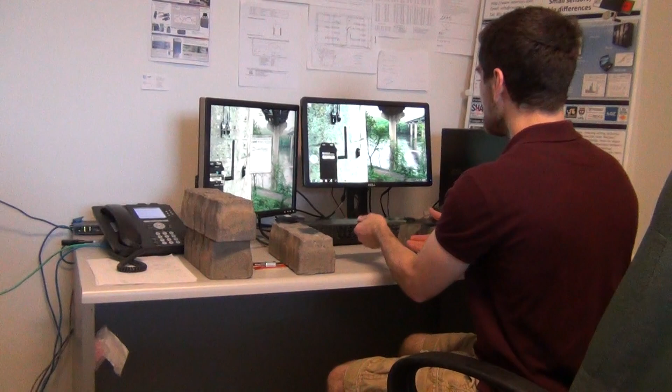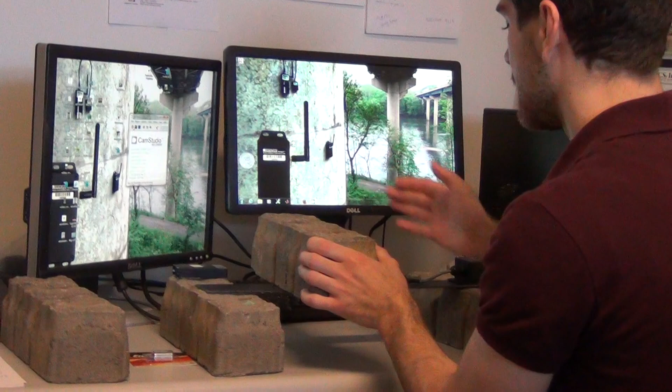So first we have our setup. We have our strain SenSpot attached to a beam, so we're going to be looking at the strain that this beam goes through. So what we have with our setup is we have it resting on two bricks, and then we're just going to take one of these bricks and put it on the beam and see what kind of strain the beam goes through, and then we'll put the other brick on top and see how the data is collected accordingly.

So just materials for the setup is we have the strain SenSpot sensor with the beam, we have the two bricks that it's going to be resting on, we have the other two bricks that we're going to be putting on the beam, and then here we have an Energizer lithium CR2 battery. This is the recommended battery that goes in the SenSpot to get the maximum battery life.

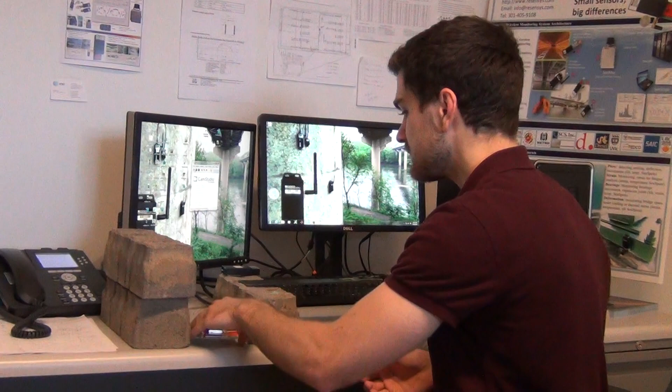And we have an antenna that we're going to attach to the SenSpot. The polarity of the antenna is very important. On the SenSpot we have a male port, so we need a female port on the antenna. Only a male to female connection will work. So once we have the antenna connected, we're just going to flip the antenna up. And now we're ready to open the SenScope software.

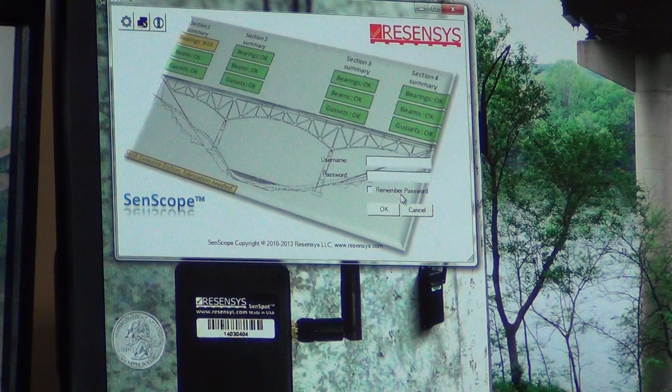Now once you're at the title screen of SenScope, you don't have to worry about this login information at all because we're going to be in live mode. Also, because we're going to be in live mode, you have to make sure that you have the licensing dongle and the USB sync dongle. Both of them must be connected to USB ports on your computer to use live mode.

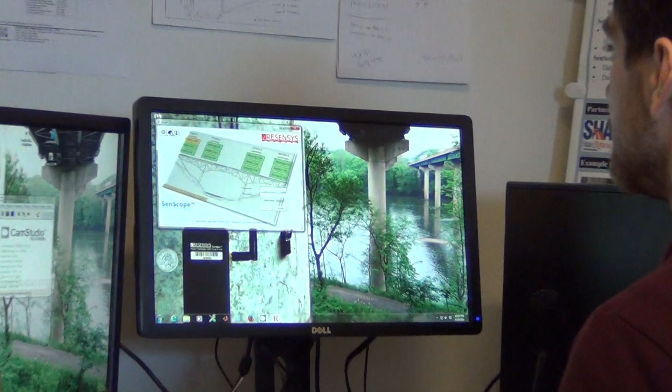Once everything is in order, we go to the second button, which means live mode, and we just click it. Once SenScope opens, under data source, we pick the live radio button. Now, before we open the serial port, we just want to make sure that the COM serial port settings are okay. The COM port is usually selected as a default by the software.

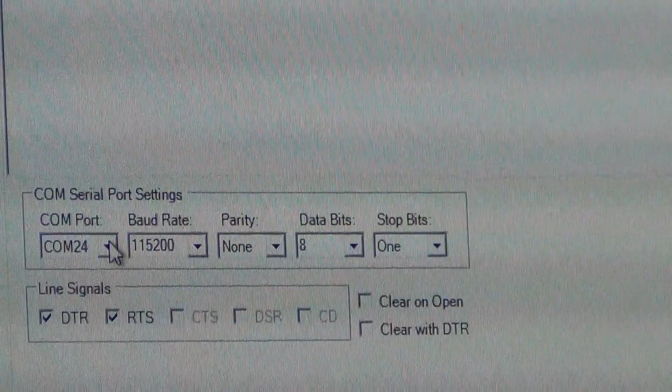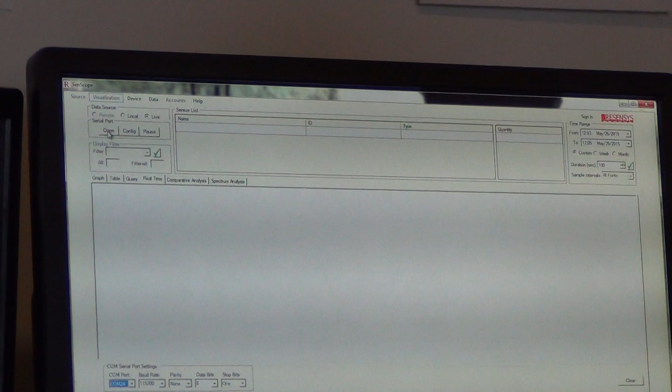More things will show up if you have more devices connected to your computer, but you just have to select the appropriate COM port. The baud rate, parity, data bits, and stop bits should all be at their default values when SenScope is first opened. So now that everything is good, we will open the serial port and start collecting data. So here are some data packets that are being transmitted.

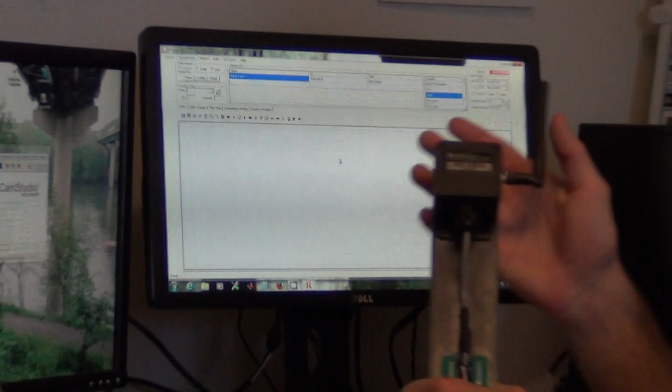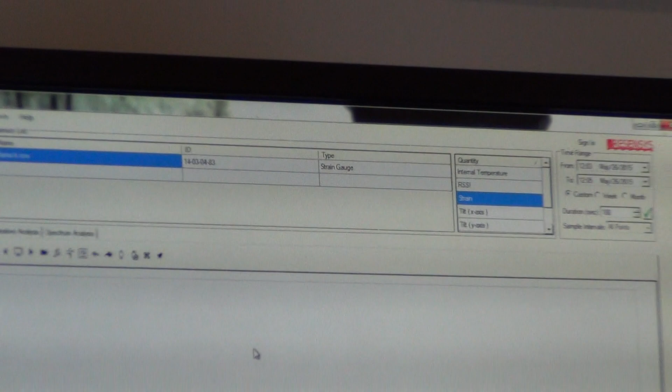I'm just going to go straight to the graphing mode, and we want to look at this strain SenSpot. So I need to identify it on the computer. So usually there's more SenSpots on the computer, but just for demonstration purposes, I have to look at the ID number. Here I can see that the ID number is 14030483.

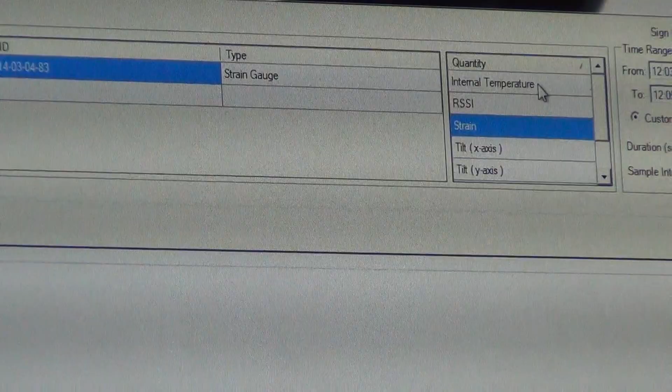So usually there are many more sensors on this sensor list, but I would match up the ID 14030483, and I also know that it's a strain gauge under type, and usually there'll be other types like acceleration and others. Now I can choose which quantity I'd like to graph. I have things like internal temperature, tilt, strain, and now we can see the other SenSpots popping up on our list.

So I'm just going to highlight strain, make sure that I have my appropriate SenSpot by the ID highlighted, and I would just press Add Chart. So here I can see all of the data that this SenSpot has collected in strain. The units are microstrain. This is all the data that we've collected since we have opened the serial port.

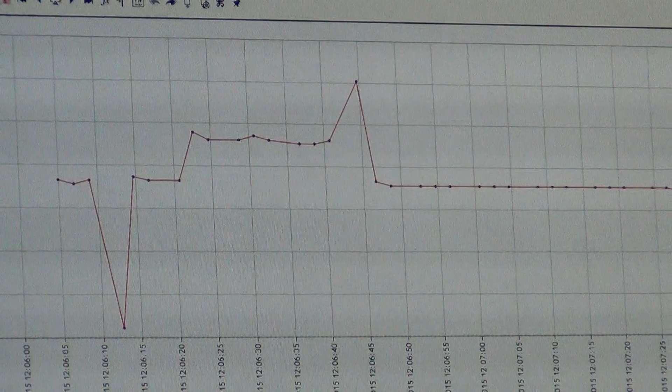So now I'm just going to put the beam under a little bit of stress, administered by the bricks. So I'll take the first brick, and you can see that the data right now is pretty constant, and when I put this brick on, you're going to see a huge change. So I'm putting the brick on right now.

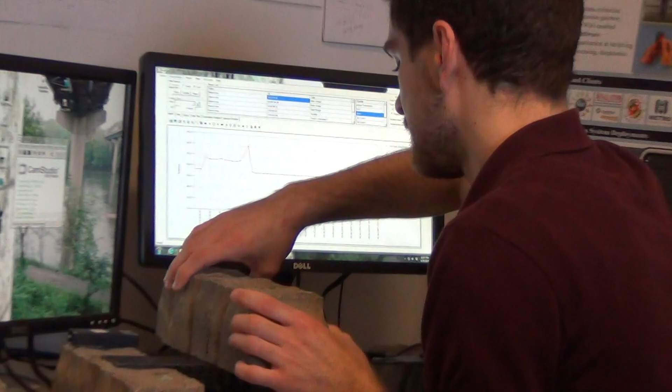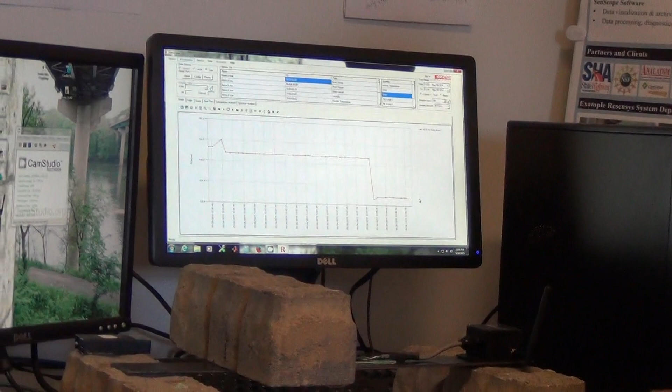So here we have that it's about 147 microstrain, and after the brick was put on, it went down a lot to around 108 microstrain, and we'll just let that transmit one more time before we put the other brick on. And you can see here it's pretty constant.

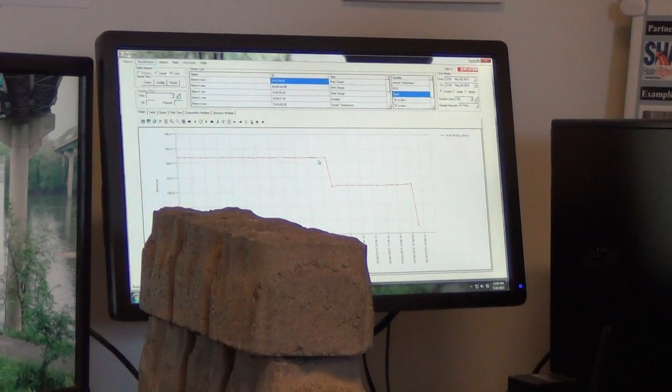Alright, I'm going to put the second brick on, and again you'll see a big jump in the collected data. So I'm just making sure that the brick is stable. Don't want it to fall. And now you can see, this is when no bricks were on it. This was when the one brick was on it.

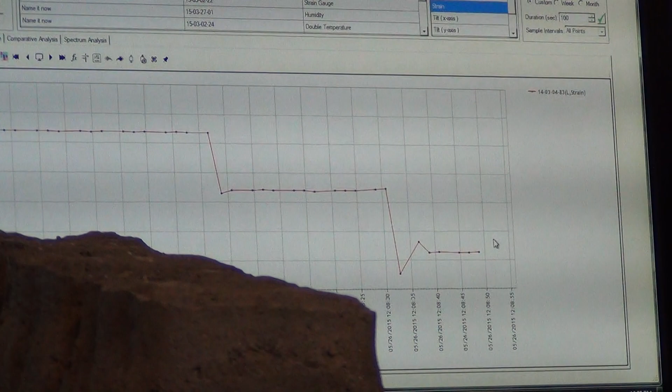And now the strain jumped a little bit because I was moving the bricks around, but it went down again even further from around 108 to around 65. So we'll let that transmit one more time. Alright, now I'm going to take the second brick off, and we'll see the data come back to around the first brick data. So I'm taking the brick off.

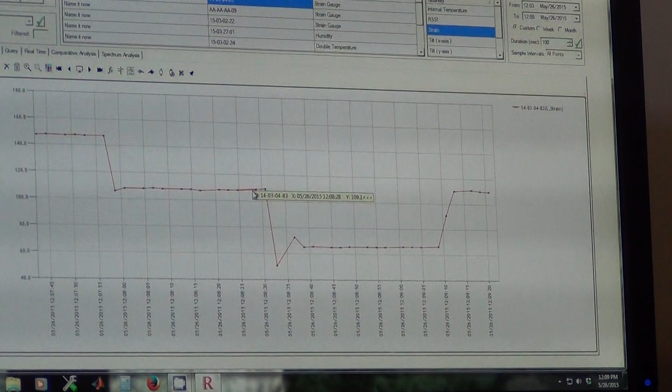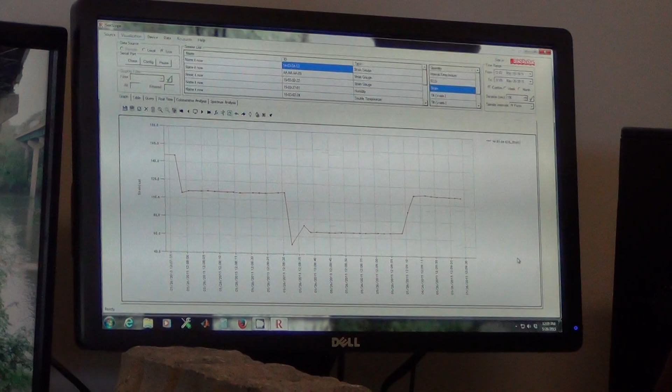Here's our jump that we were looking for. It comes up almost instantaneously. And we're back at around 110, which is very close to where we were before compared to 109 or 108. And now I'll let it transmit one more time. And then I will take off the last brick and put it back to its original state.

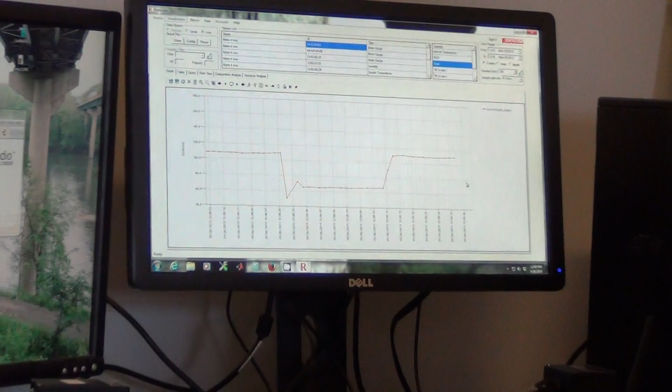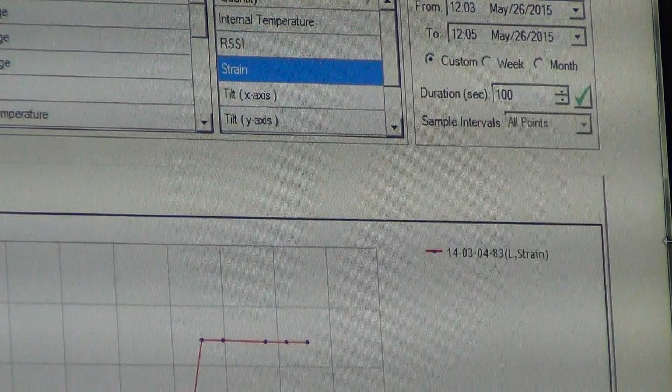So there's the data. I'm going to remove the brick. Good, now it's back to the original state. I'm going to widen up this data just a little bit so that we can see all the data that we've gone through. So with this duration, I'm just going to make it 200 so that we can see more data. And I'm just going to pause the graph also so we can look at it.

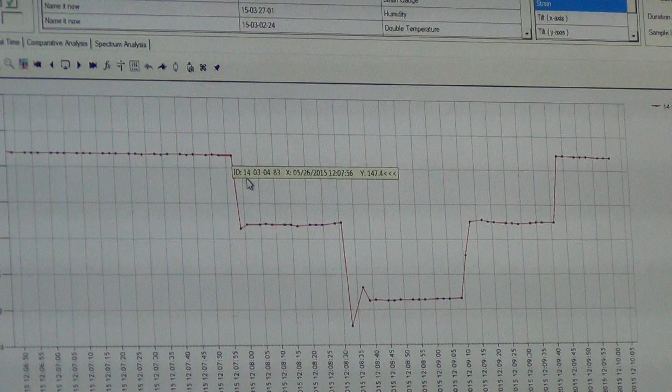This stops not the transmitting, but just stops the graph collecting data for a second while I look at this graph. So here's when we had nothing on the beam, pretty much consistent around 147. Now this is when the first brick was put on, and it jumped down to around 108. And then this was the second brick, and we saw a little bit of variation because I was moving around the brick to stabilize it. We went down to 65, so we went 147, 108, and 65.

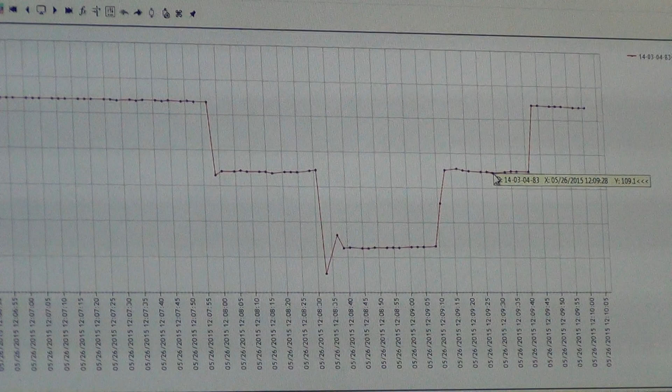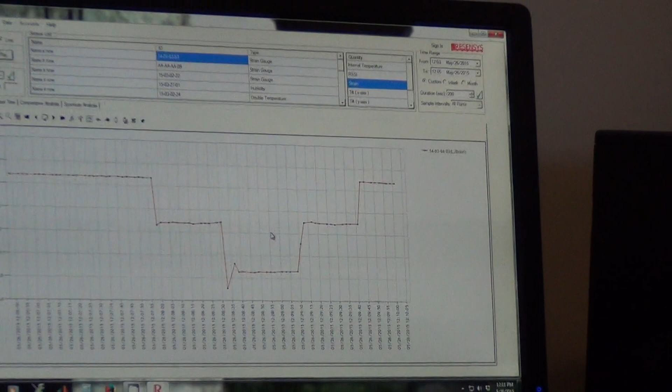Now when we removed the second brick and had only the first brick, we went back to around 110, which is very, very close to what we had originally. And then when we removed everything, we were back to 148-ish, and that is extremely close to where we were before. So that's a demonstration of the data that the SenSpot collects.

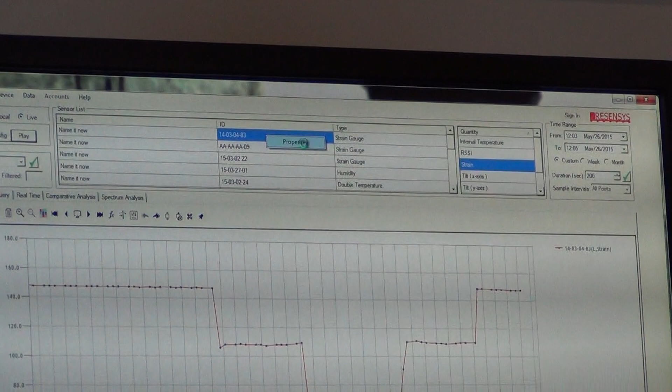If you'd like to change the properties on the SenSpot, you just right-click on the ID and left-click Properties, and here we can name it under the General tab, and under the Calibration tab you can do the offsets and coefficients as you see fit, and just save any changes that you've made.